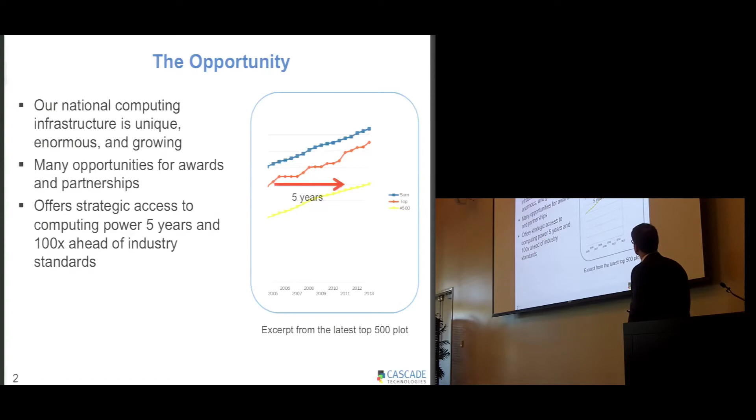At a very high level in the United States, at the level of Congress, they're interested in enhancing the competitiveness of the industries that we have here in the States. And so there are many opportunities for awards, and really this offers strategic access to computing power that's 5 years and 100x ahead of the best industry standards. And so that's the carrot.

It's not simple though. In my experience, we're pursuing a model that looks like this. It has these ingredients for success. The first piece of course is the architecture, and we're going to leave that to the experts. But an important component of being successful is scalable software infrastructure. This software infrastructure is on a trajectory, there's no question about that, but it has to work today as well. And it has the components of scalable solvers, and I'll talk a little bit about that, that's a given.

But actually there's other scaling issues that we need to get into to make these things useful and learn from them. The first is we need to be able to scale up the problem on the machine. A real problem, we can't just type in 1024 cubed and get a big calculation. Real problems involve real geometries, real meshes, real chemistry. These problems are very difficult, and you can't just send them in a FedEx envelope to Argonne. You need to be able to scale them up on the machine.

And you also need to close the loop and scale down the results to get them off the machine and into the brain of someone who actually understands what you're computing. And I think there's an important analogy that we could draw here. As we move towards exascale, we need an important focus on diagnostics as well. How we diagnose these simulations that we're doing. And I'll talk a little bit about what we're doing in this regard.

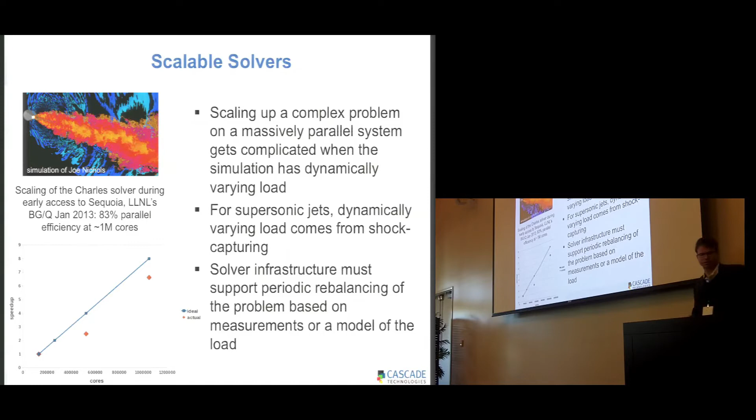If you wrote a CFD code 20 years ago, what you did was you carefully designed your data structures. And then once that was set, you went ahead and built everything around those. Now you need to hold those a little more loosely. Maybe completely loosely, as some of the domain-specific languages are describing.

You know, Jackie mentioned that Exascale is probably not going to mean that we build big databases and then go back and revisit them. That's not necessarily true. I mean, if we think about solving adjoint systems or other problems, we probably will have a big out-of-core component. And so I/O is going to remain an important part of these systems, collecting this data, revisiting it later. And so we looked at I/O scalability while we were on Sequoia as well.

And what we found is that when we first just ran this simulation of jets, the I/O was awful. You know, this is the throughput in gigabytes per second that we were getting for our I/O at 1 million cores. And unfortunately, it just grinds the whole thing to a halt.

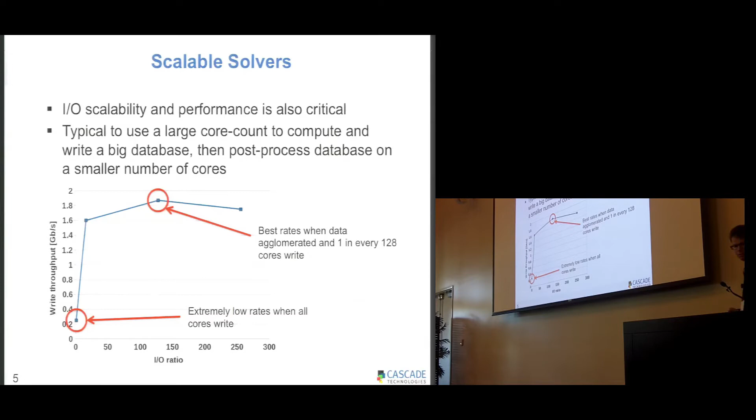What we found, though, was that by essentially holding the data loosely and making use of some of the architectural decisions that were made in the software already, we were able to write to the disk from much fewer cores, and this is the ratio of write cores to total cores. We could vary this architecturally based on the design. And we were able to find an optimal point, which is still modest relative to the real hardware capabilities, but let me explain why. And this maybe gets to some of the complications with trying to do real simulations.

So here I've got a picture which shows you how the I/O works for one of our codes. We take a simulation that's partitioned for the simulation across the processors, and I'm just showing that here with this coloring. Now, before that gets written to the file system, we actually reorder it. Reorder it in memory. It's an enormous transpose operation.

And the reason we do this is because it gives robustness to the final data structure. If we go back and have to compute on a different number of cores or utilize a post-processing utility, that reordering is an important step of getting robustness into the meaning of the files that we actually write.

Now, when you write from every core, that reordering process is what was kind of slowing the file system down. But it was easy for us to just introduce a split in the communicator, use the reordering process to actually reorder to a reduced number of nodes, and write to the file system and gain all of this efficiency.

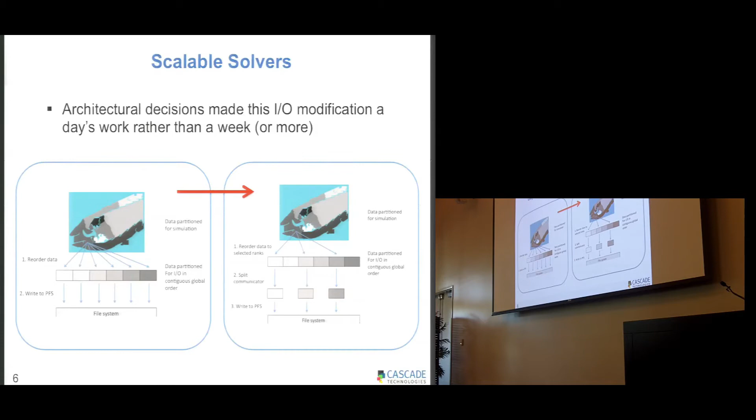So this is essentially an example of holding the data structure loosely. It's being managed dynamically as a transpose in the computer at the time, and we were able to recover I/O rates that were acceptable to us. I mentioned also that scaling up the problem is really important.

When the problem's complicated, it's not just a question of increasing the resolution. Or maybe if it is a question of increasing the resolution, that's very challenging. So one of the things we've really been focused on at Cascade is building tools which allow you to increase the resolution arbitrarily and in very flexible ways.

Here's an example of a chevron array on the exit of a nozzle, typical of one of the nozzles that we would compute at Cascade for noise. This is an example of a complicated mesh in a combustor sector where we've wanted to refine the grid and understand the grid-dependent aspects of the calculation.

This can be done now as part of the simulation process. And it can also be done in a solution-dependent way. These kinds of tools are going to be critical to allow real problems to scale up on these systems.

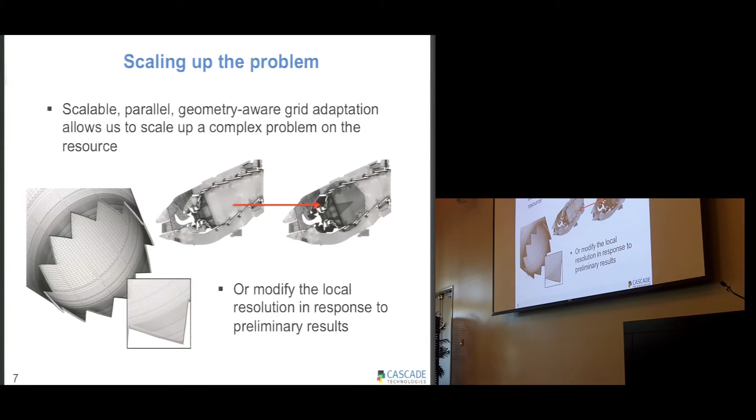The other piece of the puzzle, as I mentioned too, is scaling down the results. I mean, maybe a little bit different from Fred, I think an Excel spreadsheet will still have a very important role going forward. And sometimes you have to get down to that single number or that graph in the hands of the analyst who can make decisions. And so these results, we have to get them into the brain of someone who can gain insight from them.

And I try to think of analogies in other industries where this occurs. Like, is it really the programmer that has to understand the device that's being simulated to get the insights? And the analogy that occurred to me a while ago was that of a radiologist. You know, a radiologist is imaging the body and looking for disease and has a sort of knowledge about disease and doesn't really care about the imaging infrastructure or the CT scanner or MRI scanner.

And I think this kind of diagnostics has to be a complementary part of what we do as we go to Exascale. So in our codes we have probes and traditional parallel visualization approaches. We do expression parsing, but we also do imaging. And so you can take a simulation, and instead of using the high-performance computing to do the calculation, you switch over and move into an imaging mode.

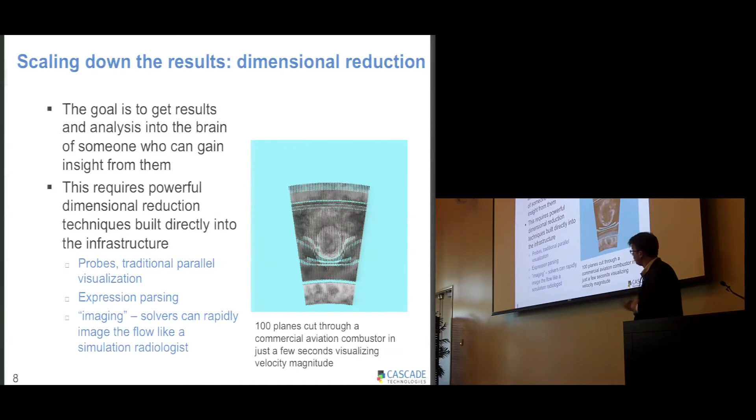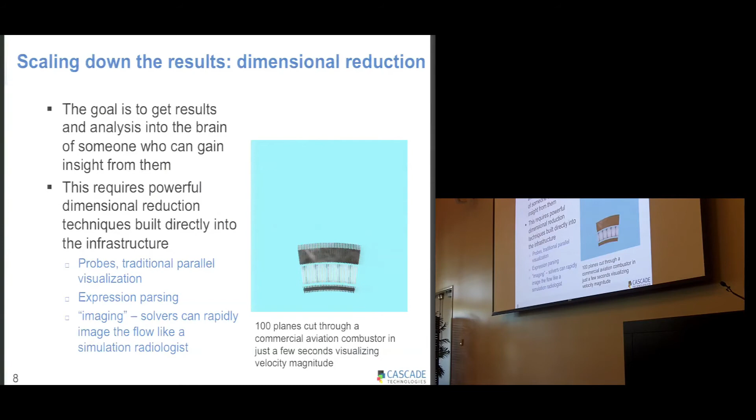And it's amazing how easy imaging is, actually. It's a really nice problem to solve when you have a chance to do it. And you can rapidly drop out an enormous number of images and inspect the entire three-dimensional domain in an iPhoto, if you want to. And so this is an important piece of doing dimensional reduction that we're focused on.

So let me finish off just by describing to you specifically a few discoveries or understandings that were really made by leveraging these resources right in the present day. One of them, you may have heard a talk given by Joe Nichols in the past. He was really the principal investigator of this work. I worked with him closely, though, to make sure that the code supported this activity. And Joe was interested in the problem of crackle.

So when you have a supersonic jet issuing from a nozzle, and it's high temperature often as well, sometimes it can crackle, which means that there's a component to the sound that kind of sounds like clapping. Very loud, though. And like a few of the great problems in the world, there's a lot of debate as to the cause. And this is what's exciting about this problem.

There was a camp of people that thought that this crackling problem was a nonlinear propagation problem, sort of unrelated to the jet, but as the waves left the jet, they were strong enough that those nonlinearities are what resulted in the steepening, and by the time you eventually arrived at the observer or the microphone, that's where you heard the nonlinearity, the crackling. The other camp thought that maybe it was some embedded noise sources, but there wasn't evidence for this.

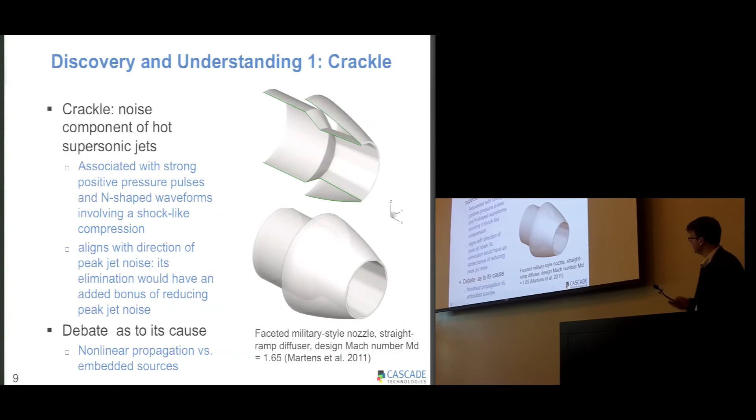And so what Joe did was he went off and said, fine, let's compute it and see what we get. And so he took a nozzle that crackles, partnered with Steve Martens at GE, John Spyropoulos, who is here from the Navy, and us in terms of the simulations. Sanjeeva Lele was involved in this work too. And gridded this thing up and started to compute the flows.

And so here I'm going to show you just a shot of one of his calculations. It's not looping, by the way. On a big resource like the ones we have access to at Argonne in this case, or at the ERDC, one of the computational divisions of the Department of Defense, you can run for a long time. And what you're looking at here is the temperature field in grayscale in the center of this jet. It's obviously exhausting from left to right, like every good fluid mechanics person does.

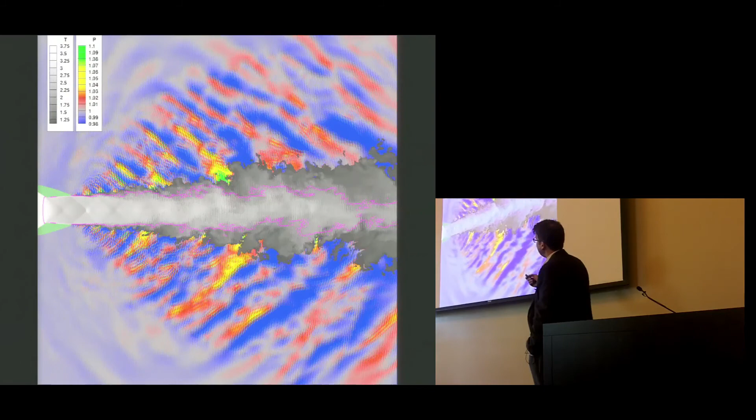And you're looking at the pressure field, and you can see evidence of crackle when the pressure amplitudes go into the green. So it's a very uncommon phenomenon. It's not happening all the time. But the important thing is Joe observed evidence of it and was able to start to go back into these simulations and diagnose the causes of it in the near field of the jets and penetrated the shear layer.

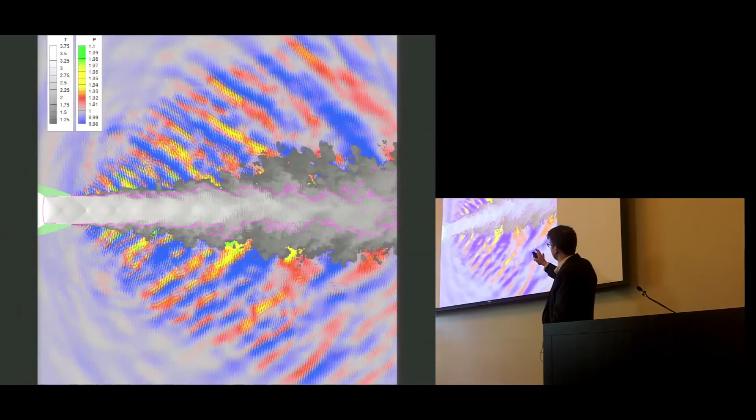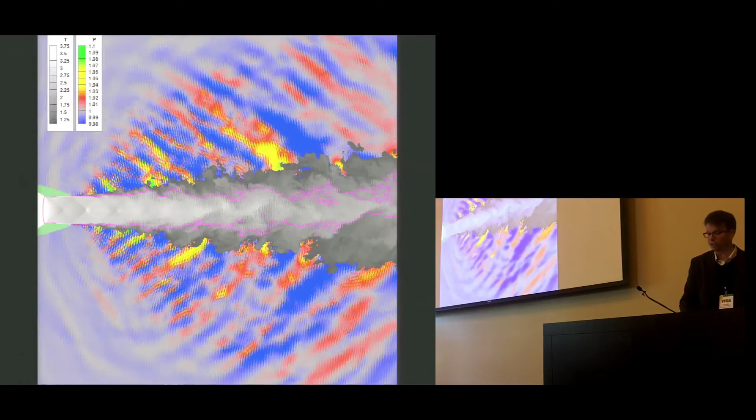So even though nonlinear steepening is likely present in these problems, there's definitely strong evidence now for the near-field sources of crackle noise. And this points to great possibilities in the sense that you can control crackle. And in fact, Steve Martens, who was a partner in this research, has demonstrated experimentally that crackle can be controlled by near-field modifications of the nozzle through introduction of chevrons, for example.

So these high-fidelity LESs enabled observation of these N-shaped waves, and in a sense, they addressed this controversy or this dichotomy that was going on. And you can get more information on this. Joe's published a bit about it, and I know he continues to analyze the real cause of crackle and the interaction of these nonlinearities in the shear layer.

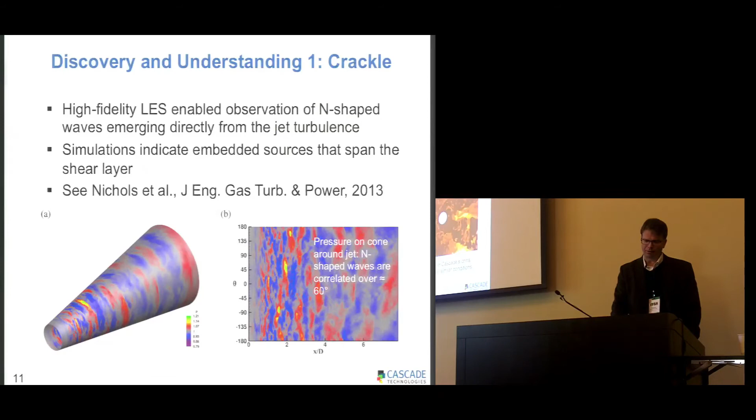Let me give one other example just before I conclude. And I want to start with just a piece of background information. We look at these simulations visualized sometimes with all the vorticity, and I wonder what it means or what I'm supposed to understand. I mean, it looks complicated. But sometimes there's a picture that emerges that gives you a way to think about what's going on physically in a simulation. Now, this was one that Mirko Gamba produced as part of our PSAAP Center here at Stanford.

This is an experiment of a sonic jet of hydrogen in supersonic crossflow. And there were some grad students in Godfrey Mungal's lab earlier than Mirko who actually imaged this for the first time. But what they did was they took their planar laser sheet and put it right near the wall of this jet that's being introduced. So you've got a jet that's issuing into the environment where we are, and there's a crossflow going across. And you're asking yourself, well, where is the fuel?

Well, it turns out that the fuel is all over the place in that boundary layer. Many, many diameters upstream into this Mach 2 crossflow, and all the way to the right and left as well. I honestly think that this is remarkable, and I know that these guys found this remarkable when they first saw it. We were able to reproduce this phenomena using simulations. So this is an example of a reacting flow simulation under similar conditions, and I really wish this had been the other way around. If we had seen it in the simulation first and then told them to put the sheet there, but it wasn't. But there are examples where it has been the other way around. But this is a great example of how you think now about the mixing process of a supersonic jet.

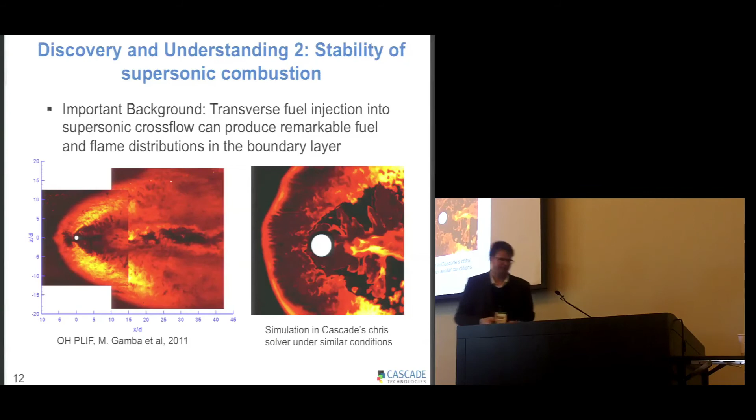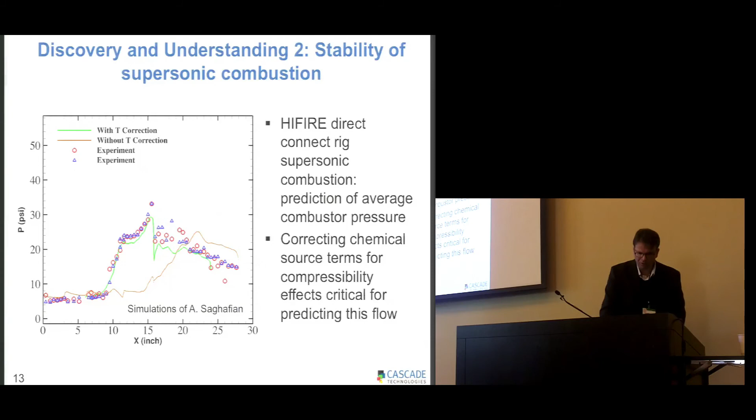So an application of this that we looked at on one of the national facilities is to look at the supersonic combustion problem. And in the mean, you can capture pressure measurements and compare that data to experiments and show that, for various assumptions with the chemistry, you can recover these pressure traces quite accurately. But what's really exciting is actually to look at the instantaneous fields with what I've just showed you about that jet in crossflow. So this is a combustor that's fed by similar jets in crossflow, and I'm visualizing here essentially the temperature. It's the progress variable in our combustion method, but it's essentially the temperature in the near boundary layer. And I want to show you what happens to this combustor when we run it.

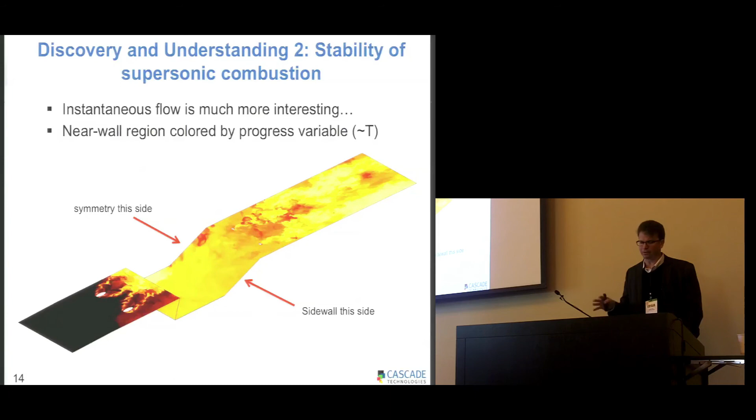So an interesting thing happens. The combustion creeps up along the sidewall, and we know that there are interesting corner vortices that live in sidewalls. The time scales are very slow. And so that mixing of fuel out on the flat plate boundary layer is interacting with the sidewall vorticity, and it's actually leading to a huge instability in this combustor that we're predicting with this simulation, where it essentially unstarts and goes subsonic and then goes back to supersonic conditions. And so this is an insight that we got into a potential instability. Now it's not clear whether this instability was observed experimentally, and we're trying to reproduce and understand its sensitivity right now as we go forward.

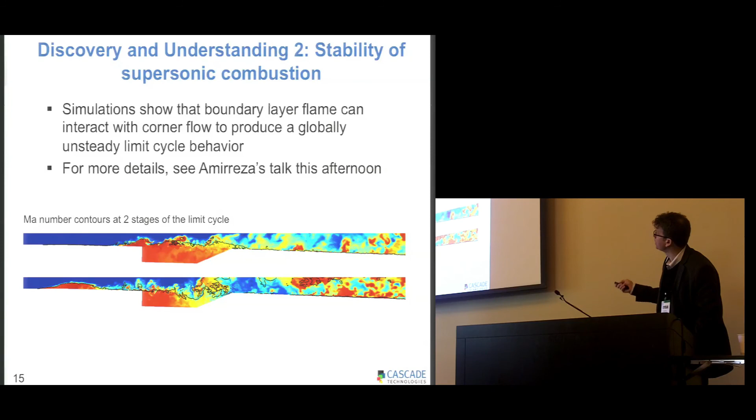This just shows you a couple of pictures, and I want to say that this is the work of Amirreza, who's going to be talking this afternoon in a lot more detail about this particular case.